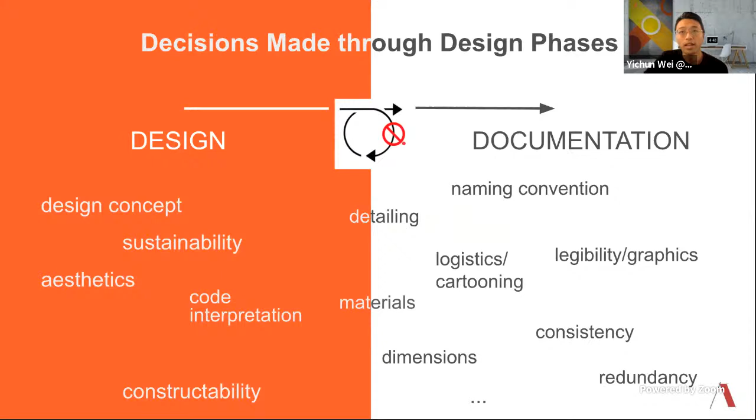Okay, so let's look at what's in those documents. Here is a choice for you. Where do you think you fall on this spectrum?

So what's your take, Maria? It falls in between, it's not black and white. So we have some part which we make media, but also some part which we make software.

Thank you. So let me make the argument to you that I think you are making software, not content. So here's an analogy that I want to draw between architectural design and software design.

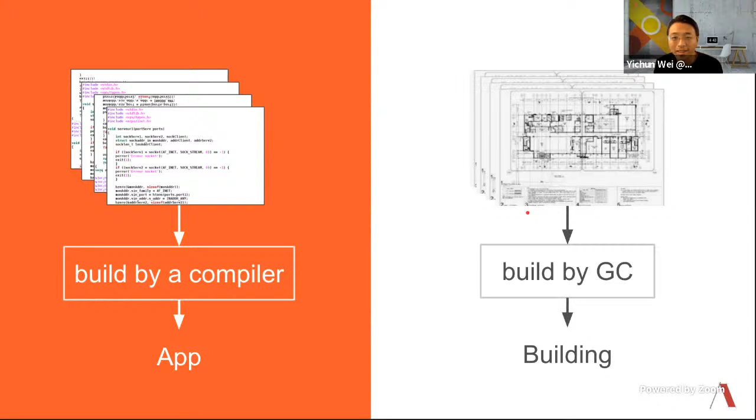So the first thing we hear when anyone starts to learn software is the DRY principle. In other words, do not repeat yourself. It's about succinctness. It's about a single source of truth, about separation of concerns. Those are the words you hear continuously if you start to do any software development.

The actual original DRY principle says this: every piece of knowledge must have a single, unambiguous, authoritative representation within the system. For a software developer, a system means the whole repository they have or the project they're working on. Now, this is the original formulation of this principle, but I want to ask you, does it sound familiar to you as an architect or as a designer?

This single source of truth, every piece of knowledge having a single representation. When you're doing construction documents, aren't you advised to document one thing at one place only once, right? It's the same principle. For example, dimensions. You want to dimension one thing at one place at one time, and text. Why? Because if you want to make any updates, you do not want to go to every sheet and update that. You want to update one place, and that is your source of truth.

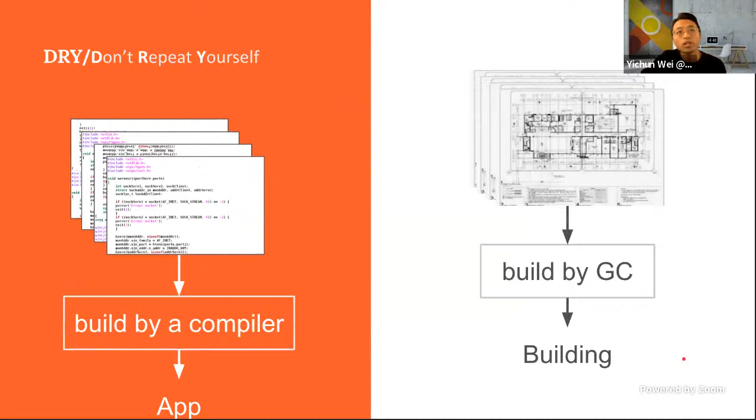So here I'm trying to argue to you that what you are making is software. Okay, and also applying this process across. So here, let me show you something. This is kind of confusing too. On the left-hand side, I'm showing you one typical thing software people call application architecture. They call them architecture.

And I'm quoting Mies van der Rohe, a famous architect. He said architecture starts when you carefully put two bricks together. So here perhaps you can understand why those software developers call themselves architects. Their title actually has architect in it. It's because they are putting blocks together. You can see the blocks over there.

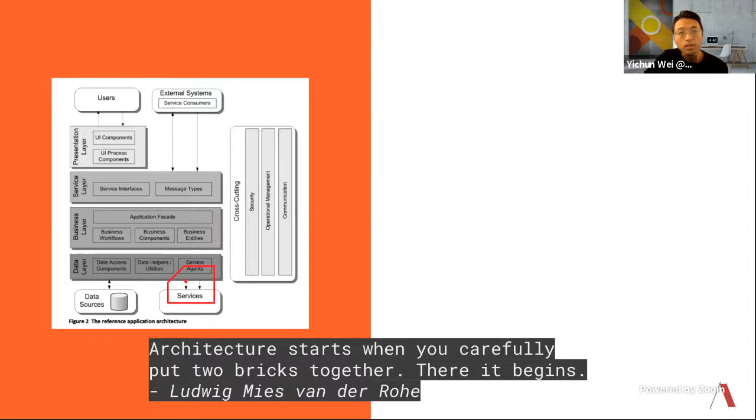If you do a callout here, that's the interface between the two blocks. The actual implementation needs to document how the two blocks interact together. If I do a callout similar to the joins, you see there's interaction happening between two blocks, and the software developer really has to go in using source code to document how that happens.

It's not very different from this typical parapet detail, where it's documenting how the walls and the roof go together, and perhaps more than two elements with the panels. How do they go together? So in the sense of this parallel analogy, this is why I argue to you that you are making software. Not content, at least not something delivered to many, many consumers.

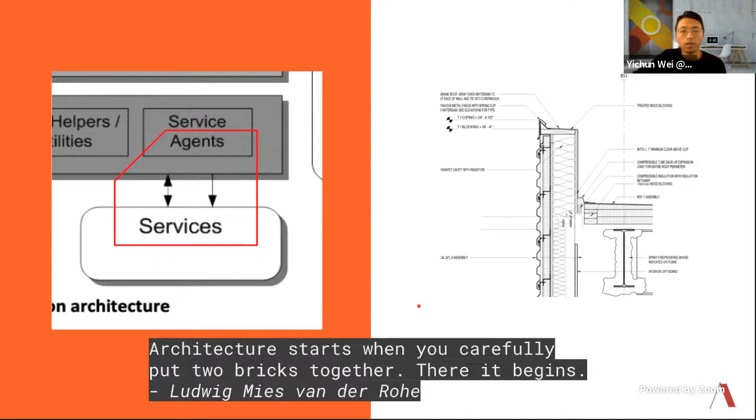Of course, there are companies who build a lot of units out of a few, like room plan A, room plan B, room plan C. Where do we fall on that spectrum? I don't need to mention. So also applying the do not repeat yourself principle across projects will get you reuse of your source code. That's what's been happening in software development so much over the years, and I think that's why it's crucial for software developers to gain their productivity.

So imagine I'm one developer tasked to implement this interaction between the service agent and services. Just think of it as bricks. Even as an experienced software developer, first I'm going to look at how people have done it before. Can you give me an example of how similar things have been done before, right? Do they have such a thing?

Well, that is a solution. That person came up with it, maybe collectively or individually, as a solution to that problem. And for me, as someone who wants to accomplish similar things, I may actually copy this to my source code and then modify it and use it.

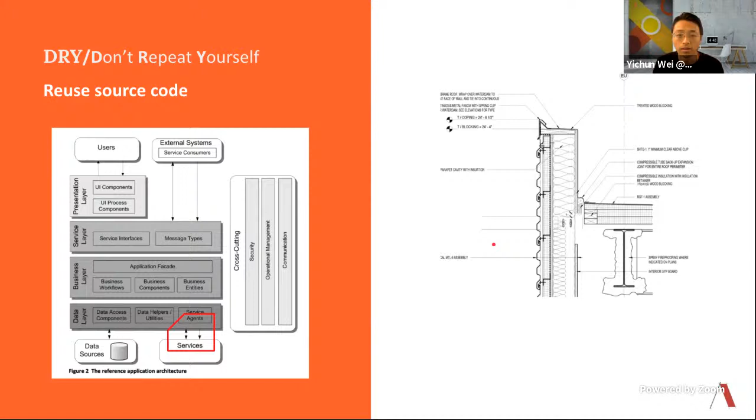projects. Now the question becomes, do we have such a thing in AEC for us to search something and reach a solution like this, reach your solution? Do we have it? If we don't have it, can we have it? Or could AEC actually get there collectively? So this is what we came up with.

So a little more than 1 year ago, actually in the beginning of 2020, before the pandemic, Nick Cameron from Perkins&Will had reached out to us with this challenge: the industry has over 100 years of knowledge encoded in your construction documents. You have delivered, you have figured it out, in those details, texts, views, annotations everywhere.

But for each project, you're still starting from scratch, more or less. And that knowledge either disappeared or is embedded in people's heads. They moved on. And what are firms being left with? Not so much, except those drawings. And we think there is a lot of data embedded in there, and that data is reflected or embedded in your work, or used.

That is like a sort of conclusion of your interpretation of code, your solution to constructability problems, and let's say your choice of material. So for a lot of those challenges you have figured it out, you have your conclusions or solutions in there. We call it institutional knowledge in past projects, and this is what we want to build on to help firms preserve it.

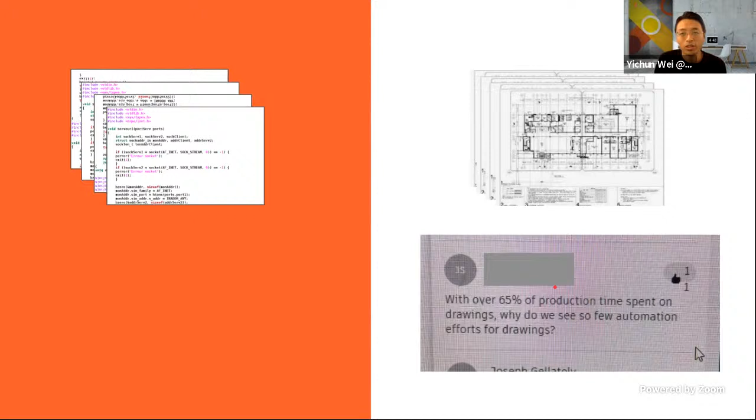Now, perhaps you are well equipped to answer the question, why do we see so few automation efforts for drawings? In order to answer that question, perhaps we just look at the left-hand side, the software side. Does software have a lot of automation? The answer is maybe yes. A lot of it in what they call continuous integration or continuous delivery. It's not actually automating the source code, but really the process.

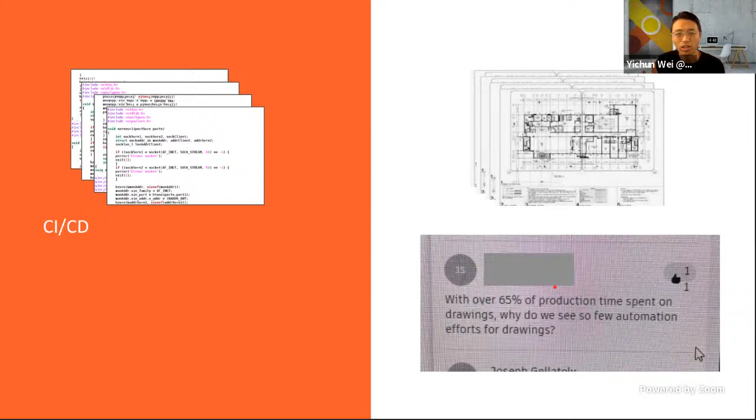Well, on the AEC side, we have model checks or BIM Manager running something every night, or Clarity to print your PDF. That's part of that. But software also has something called code generation. Basically, it is automation. It allows a developer to write at a higher abstraction with shorter, fewer code. But then a compiler plus preprocessor will write a lot of code for you, suitable to feed into the compiler to produce your final outcome.

On the AEC side, any of those generative design tools, Hypar, fall into that category. But over the years, is it really a very big opportunity? Well, if it's very easy to do, software guys, as you know, without those burdens on the hardware or construction side, will do it first, right?

Yes, actually code generation has been done. Software engineers and developers have been putting effort into trying to generate code, or produce higher-level languages with higher abstraction. Those are all of those efforts. So the answer will be yes, there are opportunities there.

But the question is, today so much code is still being written manually. You cannot automate everything out. And whatever is left, in every software engineering job today, people are still coding manually. Yes, perhaps you are coding at a higher abstraction. There's something helping you write down to the machine code in the end. But again, the compiler arguably is doing that job.

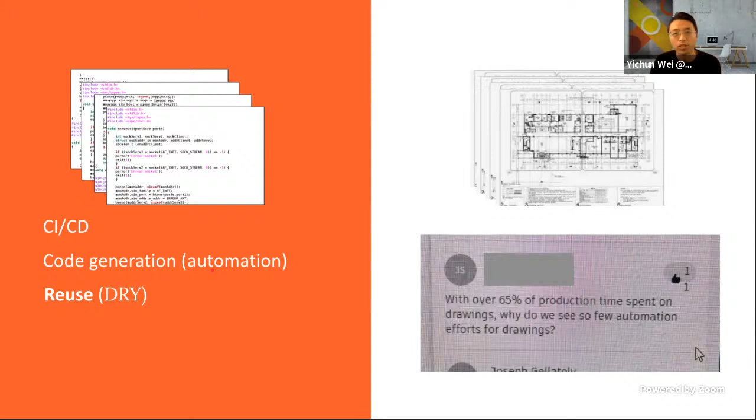But what's really happening so much, and also code generation automation, is what we call reuse. Code generation is reusing the expertise that you have built before, right? Hypar seems to be also taking that proposal. But let's look at how reuse has been done in the large picture in software. Reuse happens in components. This is happening in architectural design. Earlier, you had lines in AutoCAD, but today you have elements, 2D or 3D, in BIM design environments. And software libraries: a bunch of code packaged up so that you can build your software based on it. That's something we haven't seen a lot in architectural design.

Perhaps that's the direction you can take, to make libraries of design, perhaps more standardized versions of commonly used spaces. For example, restrooms. Maybe you have libraries of it, right? That's something we think Artifact could help with. Granted, today a lot of software libraries are hosted on GitHub, but perhaps if we are actually building GitHub for construction drawings, maybe that's where you can host your libraries.

And also, design patterns are a common solution to common problems, right? Do we have it? Well, think about the Revit templates you have. Maybe not so, maybe it can be better, but those are the starting point for the problems you have. And also frameworks. This we didn't see much, but we can talk more about it.

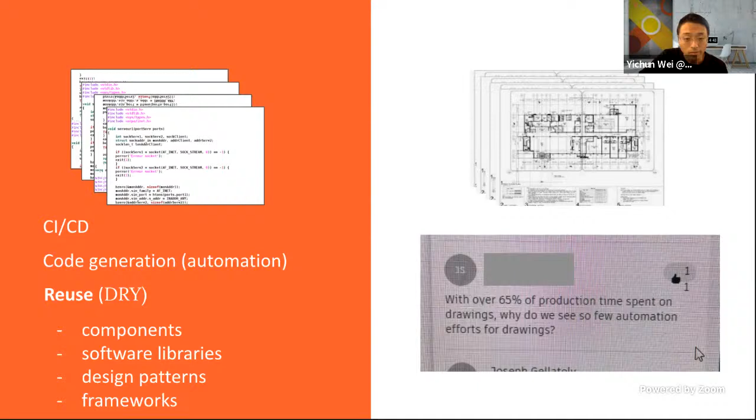Okay, so here is, again, the software architecture of a typical software today. Look at this example of reuse by software libraries. Look on the right-hand side, at the different building blocks. What I want to tell you is that today, when a software team tries to build software, they actually do not rebuild those building blocks. Those building blocks are supplied by library developers, a lot of them open source. So they devote very little to coming up with those building blocks. Most of the focus is actually on how to put them together.

That means those arrows. Most of the code developers write today is what we call glue code. They are actually putting the blocks together. And of course, they focus on the client-facing side. And this perhaps will be what architectural design will eventually become: you are going to focus on the client-facing side more, because that's your value add.

But you use a set of standardized building blocks, which constitute the bulk of your construction documentation. But finally, you have your own very special designs based on those very standard components, and that's how buildings seem to be: very special on the outside, but internally very similar. But being similar doesn't mean they are easy, because you still do the job of putting them together. So that's what we think. It's a very nice model, and why you are making software.

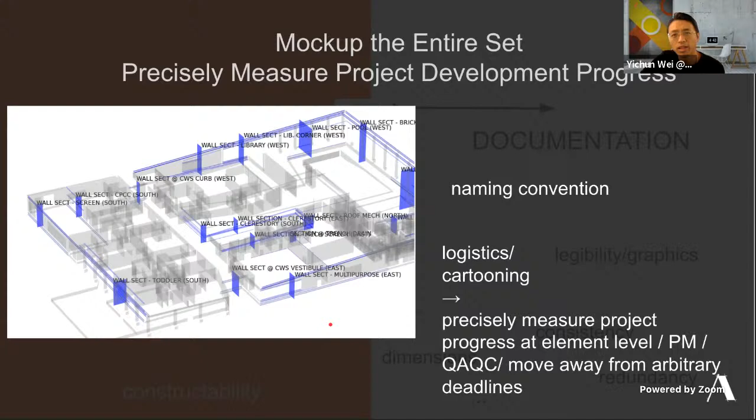Well, we are actively using a variant of our artifacts to harvest that data, build up graph connections and try to characterize those problems. A lot of it is on the graph neural network side, to predict whether or not a link exists or to predict the properties of a node. Those are the ways we think we could capture that data and answer questions. In the end, it could answer where sections should go, and perhaps where to make the enlarged plan and where to do the call-outs. Those are not very hard problems, actually, but we didn't see people working on it.

But if we can produce that progression of logic in the documentation, perhaps we can have more than what your Revit templates do today, and get you to a point where you are done with the documentation, informed by the past. How the documentation set comes together is institutional knowledge, and today you do require somebody to have that knowledge in their head, sitting at your desk, to have this done.

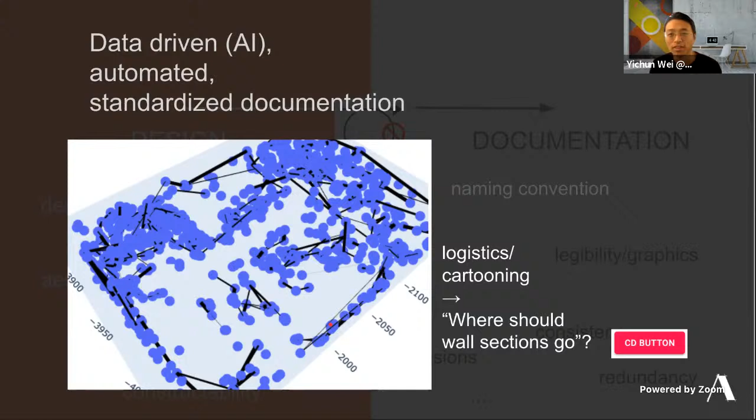What if we externalize this? This could be captured by the data if it's really been done in a consistent fashion. Okay, so that's the hope. And on the data-driven side, we actually have small products coming up.

For example, architects have been telling us they have been continuously drawing these outlines for each of the interior elevations. And once the design changes, they sort of have to go back to redraw that elevation, which I see a lot laughing. I don't know if you have that experience.

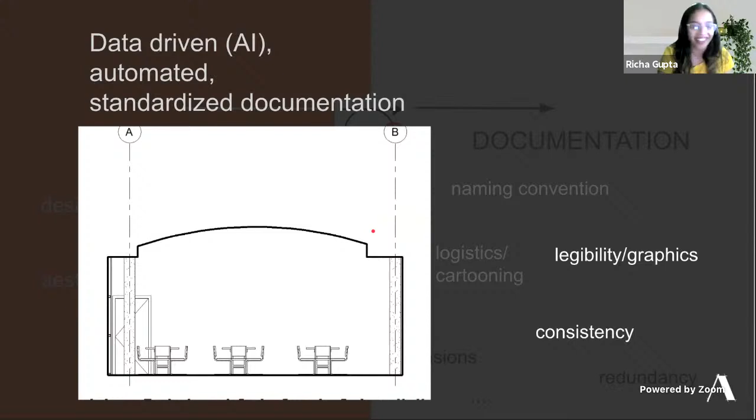You may think it's an easy problem, but it's not. It could be easy if everything's closed, but there are cases where it's actually open. You know, which way do you decide to go? You trace it up or trace it to the left-hand side? It is actually a data problem. You have to really look at what people do in different situations to make that decision. So this is how it sort of taught us you need to make it data-driven.

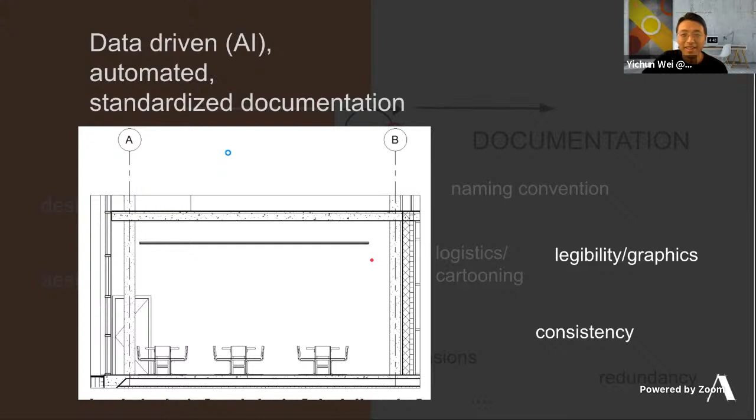All right. And also this is actually what we started with, trying to make a sort of assistant for the dimensioning. But then we quickly found out without data telling us where and what is to be dimensioned, and in a dimension string, you have a start and an end. Where do you start? Where do you end? It's actually a data-driven problem. It's a data problem that you will need to collect and read through data.

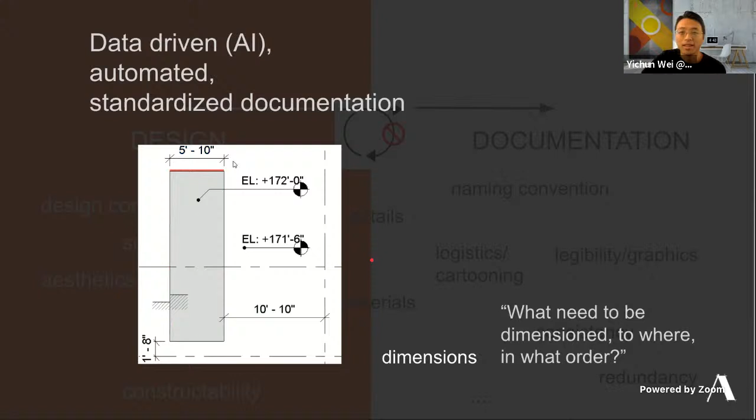By having a product like AIPrentice and the technology behind it, perhaps we gain access to data. Like here, we are trying to focus on documentation data and see if those things can be automated. In the end, we think perhaps 80% of the effort or time we put in documentation was done in a consistent fashion, so it could actually be automated in a data-driven fashion, not in a strictly codified sense, but with a pretty high accuracy rate. And perhaps you will have that CD button to some extent.

Okay, so that's all I have. I had about 40 minutes-ish, so too long.

Yeah, that's a great presentation, Yichun. I felt like it's a keynote-level presentation at a conference. You did an amazing job at explaining the whole process. And if I were an investor, I would have been considering seed or venture investing. It's a great product.

Yes, we are a very small startup. We actually haven't raised any venture funding, but just thinking that the direction we are going is what people need was sufficient to propel us to continue down the road. And especially thanks to Perkins&Will, Nick Cameron and the amazing Digital Practice team, Luke, Mario, Jeremy, who were a very important starting trigger that led us onto this journey. So it's not only us. We have a lot of friends in the industry, and we are eager to have more.

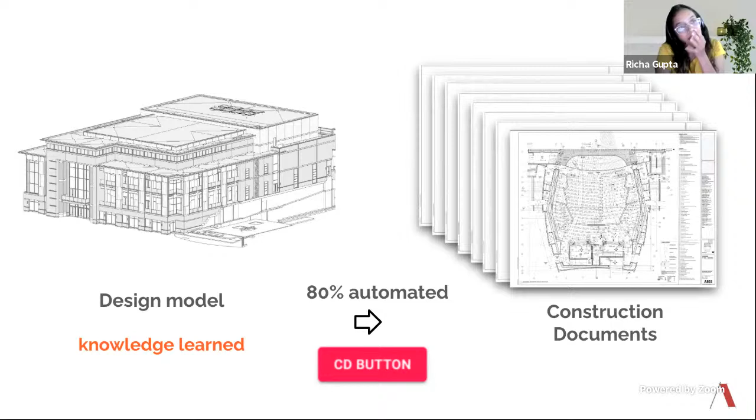So how are we going to deal with that? Are you getting my point? When we have open source, we download a detail, but then it comes to representation—what the community is for. So how are we going to deal with that? Will it be specific to that particular group of people, or what are you looking towards? Have you ever thought of this?

Well, I only have very primitive thoughts about this. That's why reusing was easier within a group, within a company, because the company would perhaps prefer to have a certain set of conventions. You may want to use a set of components that you think are more suitable, and you want to continue using that in your future projects. And maybe another entity will be more resistant to adopt it.

That's definitely the case. We think perhaps software has the same thing. People prefer to use their own libraries—in the early days there were rewrite efforts all over the place, coming up with their own library because they have more control or whatever. But perhaps in the end, collectively, if the interest for a standardized part was actually about cost, then maybe the whole profession, different companies, will eventually come down to the same set of components or families. If we talk about Revit...

2D families, I mean, and because more standard is more reusable, the whole argument was to be... think of yourself as a software consulting business. You are writing software delivered to your customer. The more standardized parts you can use in your software, the faster, maybe higher quality you can have. So it's to your interest to use more standardized parts, but focus your value-add on that very special part that you can use to convince your customer or client. In this world, we should call it client.

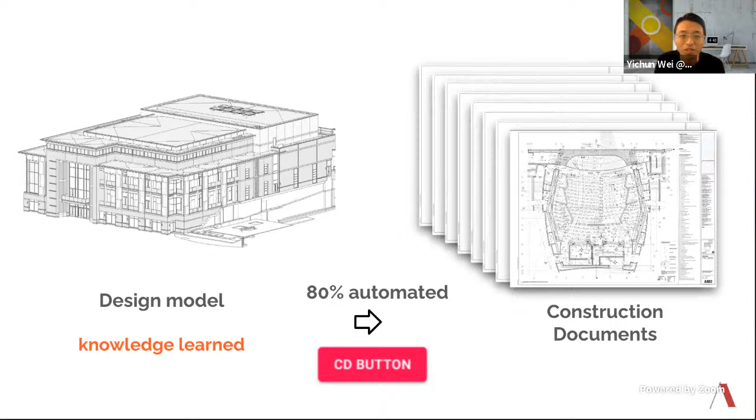But really, the first step is to have the data and try to reuse it. Remember, you are making software, so you want to make more standardized parts and build upon it. In the software industry, we see researchers right now starting to use machine learning to try to write code, but it's in a very early phase. So I keep an eye open for what's happening over there. And I do think what's missing here is not necessarily there, but really in your everyday practice, think of yourself as making software. Got it.

One thought I had is it would be quite interesting to have AIPrentice plugged into Bluebeam for auto dimensioning, because a lot of times we deal in those PDF editors for RFIs and quick feedback.

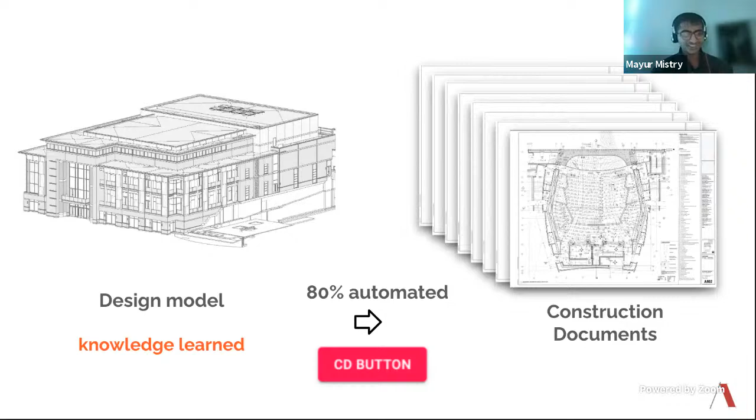One question I have is, is it possible for you to show a real-time demo? Because I used this tool and the UI/UX was great, and I'm not sure that came across from that GIF. So I think it would be awesome.

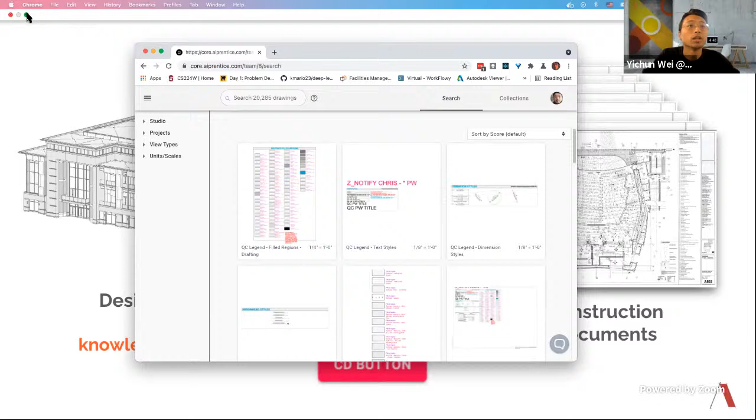Yeah, I could definitely demo this. Let me share my screen, so you can see it, right? So here, typically if I had a task of drawing the wall and the wall section, an example would be I want the intersection. How do I put a CMU wall and door together?

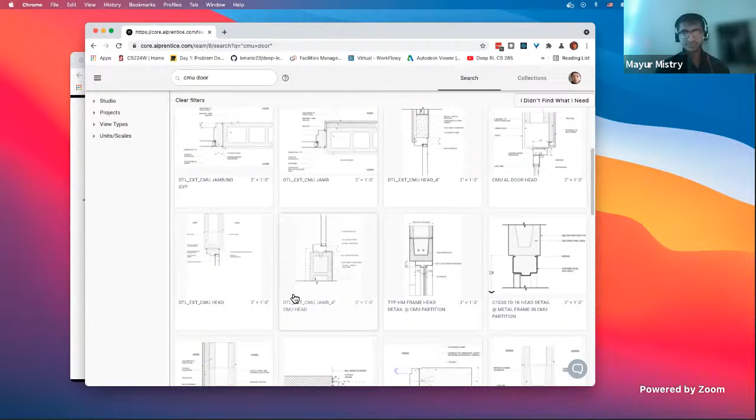So I need those details. Sharing my screen, it may become slower. Well, then those are all the details between the interface between doors and CMU walls, and maybe actually door heads.

Let's see, then those are door head details. If I go to one of these, it's kind of like a Google image search, but what you land on is actually a solution. I would more intend to think of this as GitHub.

And you get this solution, and we also show you information on where this appears. It's on this particular sheet, in this particular project. And of course, if you click this, we bring you to a Google map of where that is.

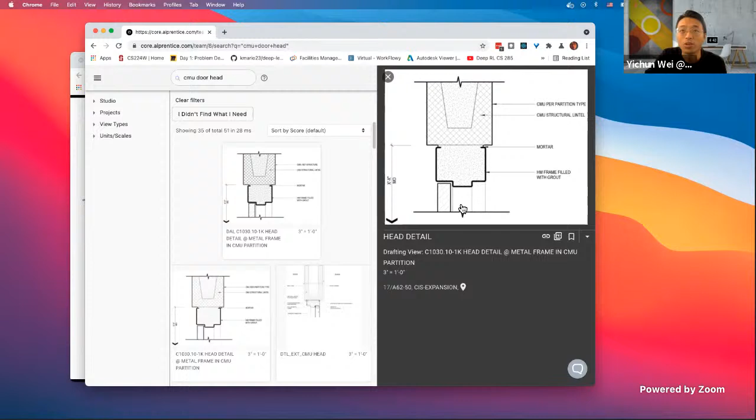Perhaps you will find the building photos. And of course, we would like to actually be able to allow you to throw in construction photos down there, so that you know, oh, this is on the drawing, and in reality, how it's been constructed, how it looks like from the construction site. But those are sort of in a future plan.

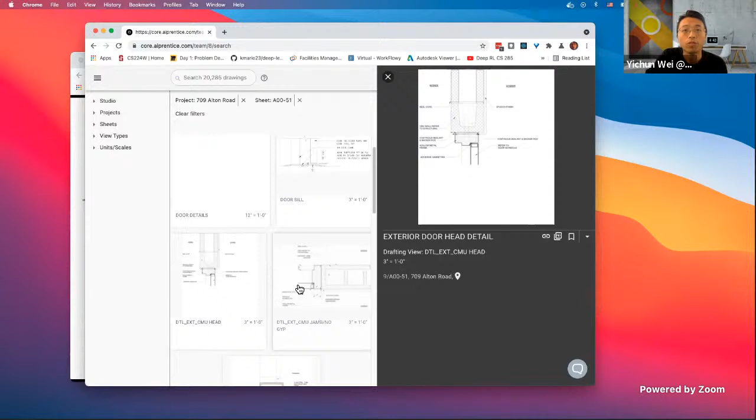Okay. Yes, and you can also click on this to go to a sheet. If we have harvested the sheet for you, and if you click on this, every detail on that sheet shows up here.

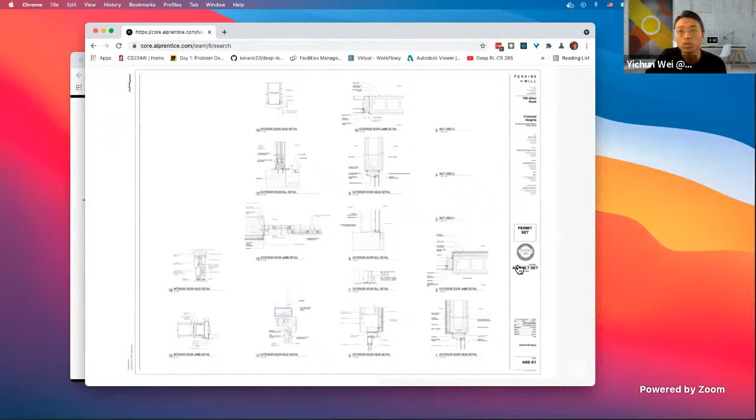But if we have, okay, here is that sheet. So you can, in a second, find out in your past projects which project you solved that problem in, and the context around it. Okay, so that's pretty much it.

As I said, it's a very simple product to use, and that constitutes our demo. Of course, if you find the detail, you can build up your design. I have a bunch of collections here. So this is door detail, right?

It's a door detail, okay, door head detail. I switch to my playlist. It's like your Spotify playlist of doors, and then I can sort of—this means this detail hasn't been added, so I add it here. So in the future, perhaps I could...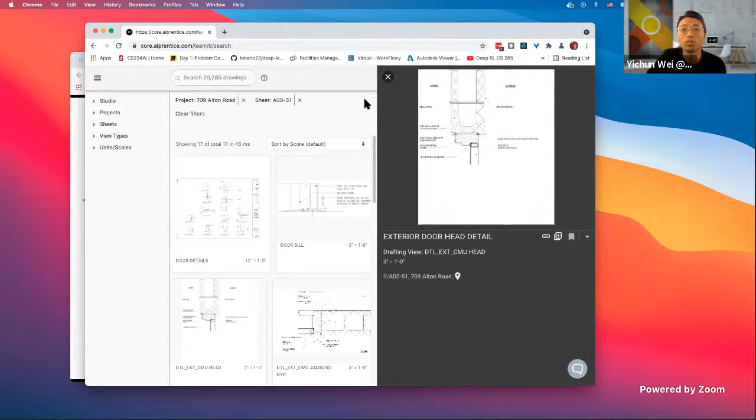I have my door collection, doors detail collection I've just added here. Perhaps I can send it over to my more senior guy and ask, hey, do you think this detail I use is right? Or maybe the senior guy can compose this list and tell the team, hey, those are the details we need to use in this project. Those are probably the project architect's tasks, and project architects are our most ardent, repetitive users coming back to this app.

Right now, this product was built for project architects and project managers too, because they were responsible for putting the buildings together and using the right collections of details. In the future, we hope this can become a platform to transfer knowledge, so project architects can transfer their knowledge to every member inside the team, so everyone is on the same page. That's how we see this getting better.

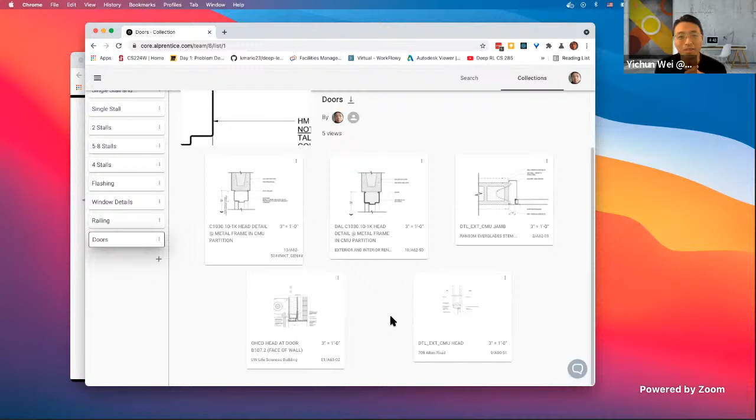This gives a totally different impression of how easy it is to search it, manage it, and annotate it. The amount of time a person can save using this, I could foresee it. And also you can sort of filter it down.

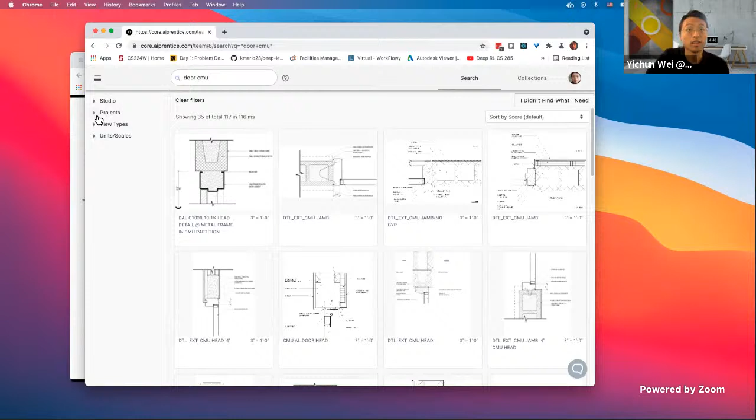As a designer, I may be interested in, okay yes, I see the door CMU or door head details, but I particularly want to know which are the projects. Here you get a list of projects that have that detail down, and those numbers are actually the number of door details in that project, that is, door head CMU details.

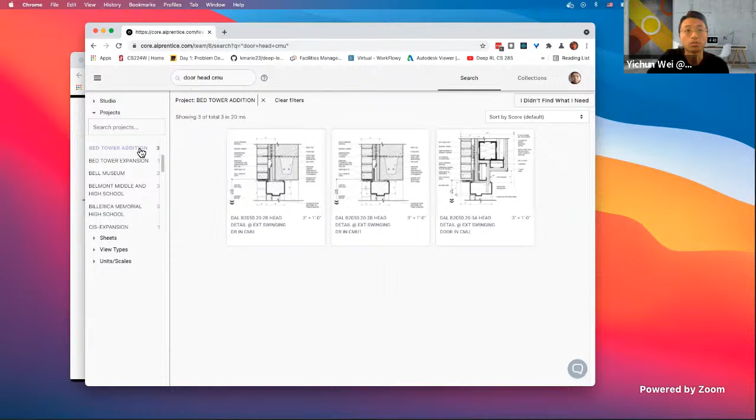You can sort of filter down, let's only look at Bed Tower Addition, and those are the door head details inside that project. You can filter down in that, or look at everyone together. Maybe I want to look at only detail views, which in Revit is called drafting view, or maybe I want to look at the door head CMU in a section, or in a detail view.

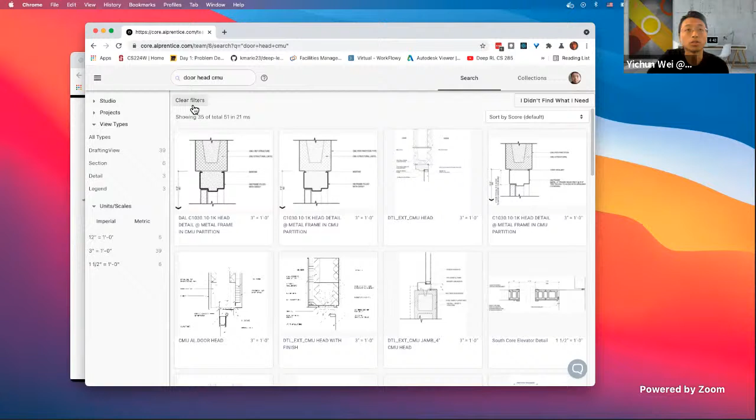And of course you filter by imperial. So without any filtering, let's give this filter. We know door head detail, CMU detail come in 3 different scales. Imperial ones, of course metric ones are very little in our database, but imperial ones, most of the door head CMU detail are in the scale of 3 inches to 1 foot. So now I only look at those 39 cases.

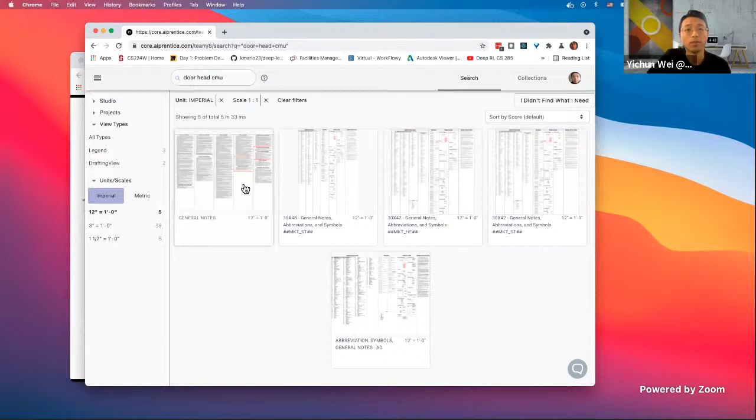But what if you wonder what's really happening to the others, or even bigger scale? Okay, so those are actually not detailed drawings, it's a door head CMU in the notes, not drawings, just notes. But there are actually 5 in drawings too. So in these several drawings, they are door head CMU detail, but they are in a different scale.

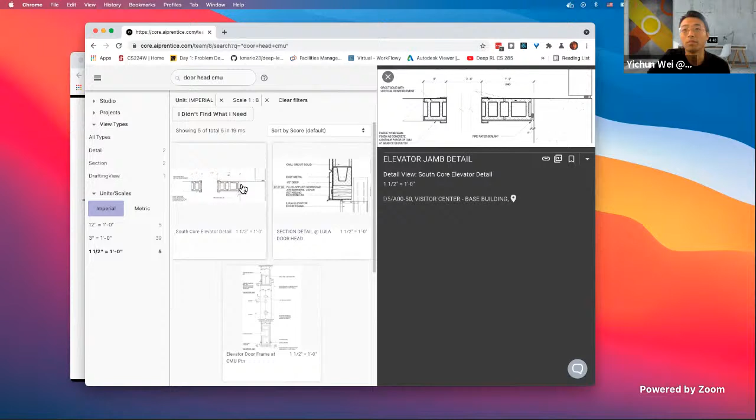Perhaps we could learn why it's in a different scale. Maybe in this project it has a special type of convention where we want to put such a detail in a different scale, and maybe that's not the case. Maybe this one is a door frame detail instead, and then it's justifiable.

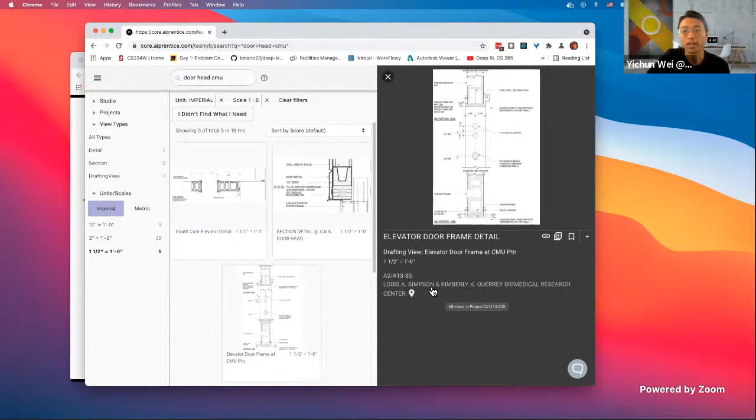You can click projects and land on all of the details inside that project. If I remove the filter of the scale and the filter of the units, then I land on all of the views inside that project.

It's Louis A. Simpson. So if it's one project, you can go through the project with the sheets - the sheet number, and then the number of how many views are in there. This can get better; actually we could only show you once you harvest, only sheets, you can just look through sheets like this.

This could perhaps help you in a mixed workspace where it's not feasible to drive to the office to find a physical drawing, and maybe you can look through it here instead. Of course, it's perhaps equivalent to flipping through PDFs, but here you can search for things and look at how comparable projects are doing it.

Those filters were updated in real time according to the search results. So that's what I want to say. We have a lot of improvements in mind to make this filter easier to use, but those are software development topics, so I'm not going to discuss too much here. It's really typical software development, nothing fancy.